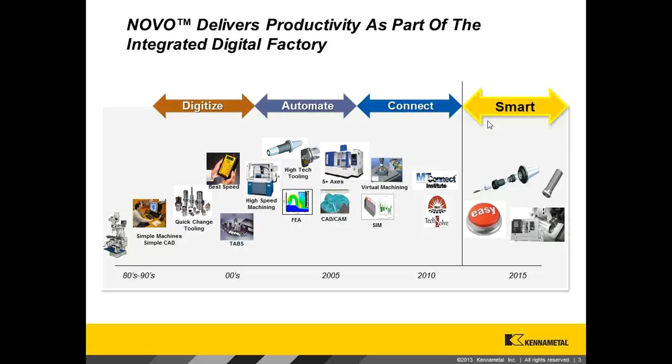And to do this, it does require a bit of data around cutting tools and knowledge around cutting tools to make all these systems work together. So as Kennametal, we've been investing not only in the latest technology to make our cutting tools better, but the latest digital experience about how our products can interact in the digital factory of the future. And this is going to be critical for all of us moving forward to meet the challenges of the megatrends on the market. So what we've started first is in the process planning area.

So typically in the past, we all know that cutting tools, while they're only 2 to 3% the cost of goods sold for a machine component, we all know that it's an enabler. If you can choose, apply machining strategies and cutting tools correctly, it's a huge enabler towards productivity in your machining process. But the key to that is always the knowledge and experience around the cutting tools, as well as the technology in the cutting tool.

So what was happening in the past, you see on the right, is typically you're working operation by operation, spindle by spindle, machine by machine to optimize processes, which does work. Kennametal actually records millions of dollars a year in what we call tool performance reports for our customers.

But what really is needed for the factory of the future is integrating this knowledge and data up front, as well as giving the productivity up front, so that you have true optimization through the art to part process.

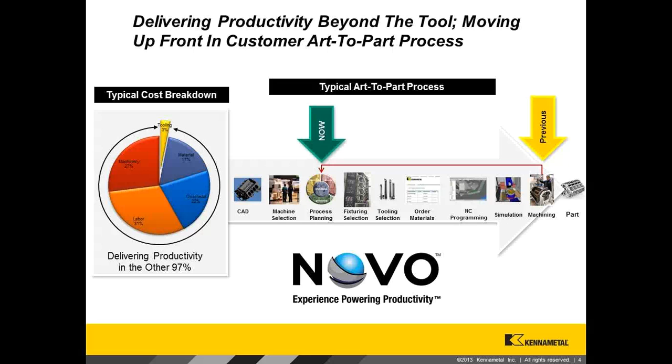So the first phase of NOVO, which is a multi-year initiative from Kennametal, is all around the process planning, the CAD/CAM area, if you will. How do we create productivity for the process plan and the process planner by bringing our application knowledge into it? And it's really around eliminating non-value added work.

So what we learned when we started talking to process planners, CAD/CAM, and engineers is they told us that they were spending an extreme amount of non-value added time searching catalogs, accessing, collaborating with multiple sources, trying to find the best, most productive solution. So what you see on the left here is a typical process planning task. You got these components, you gotta pick machining strategies, and hence cutting tool solutions for each one of these features.

And we talked to a four-person team of experts in this area. And what they told us is, in the past, this typically would take the expert cutting tool guys about 2 days together to collaborate, to put together the process planning steps, the ops, the machining strategies, and the cutting tool solutions.

And when they did that, not only was it very time-intensive, data-intensive, they wouldn't necessarily have the newest cutting tool technology because they kind of rely on tribal knowledge and what they know. They definitely wouldn't have looked up all the models and spare parts. So even if they do all this, they're still not ready to program a part.

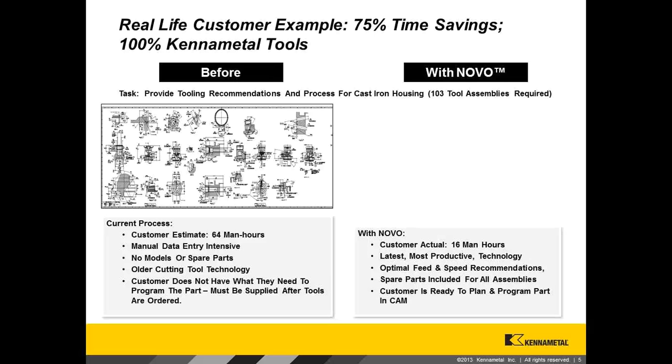With the new free NOVO PC application, which is our digital assistant on demand, they're able to produce the same process plan, which is requiring 103 tooling assemblies. It's the latest cutting tool technology because the NOVO application is cloud enabled. It's working directly with Kennametal's business system, so you have the latest technology as we launch products.

It's in there, and it's also presenting it in a very easy to use format, as well as giving all of the feed and speed recommendations and models and everything you need to program the part. So by creating this solution on the tablet or the PC, the customer is ready to plan and program his part in CAM. Much faster, much easier, much more user-friendly.

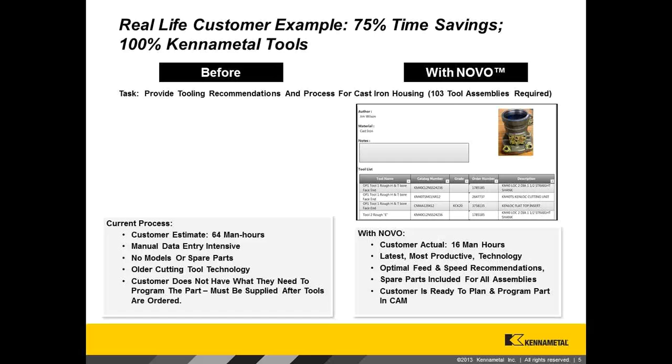So I'm going to go into a demo of the free PC and tablet application. And we launched the PC application at EMO in Hanover, Germany in September 2013. You might have seen that there's now versions available for tablets, Apple operating system, Android, and also Windows tablet versions. And that's really what's come out in the last 3 or 4 months. But that's just the beginning.

Where Kennametal really sees this going is, how do we get this knowledge seamlessly into our customers' ecosystem so that they can work in their native environment and access and leverage this knowledge without really leaving it. So what I'm going to show you now is the first, what I'd call device or system agnostic free download. You can start to get familiar with it, start to save time in your tool selection and process planning. But in the future, we're going to take this data and hopefully lead the Industry 4.0 movement and make this seamless for the digital factory of the future.

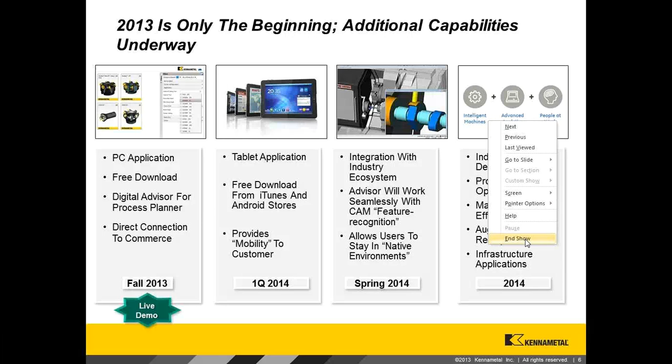So I appreciate you guys spending a little time. Hopefully you learned a little bit about what was in the background of this program from Kennametal, and you can see we have a lot of exciting things to come.

Now I'm going to launch the tablet and PC application, which is free to download from kennametal.com/NOVO.

And what you'll see when you log in is that it recognizes me, so it knows that this is Chris Merlin. It's logged in because it's cloud enabled, and I've created what you call a cloud account. Now, what the cloud account allows me to do is to organize my tools and save my tools in lists of jobs. We call them jobs, if you will, but it's really a tool list, and it's only accessible by me. And it's a real productivity enhancer because I can use it as templates. I can share the jobs with other people, and it's a nice way to organize my tooling selections for my different process plans.

However, I would tell you that you can use this solution without creating an ID. You could use it in the search methodologies without using job functionality. This would be kind of using it as a substitute for a website or a digital catalog. But the real power I'm going to show you in a minute is in this cloud-based job repository, which is something that really separates it from other solutions on the market.

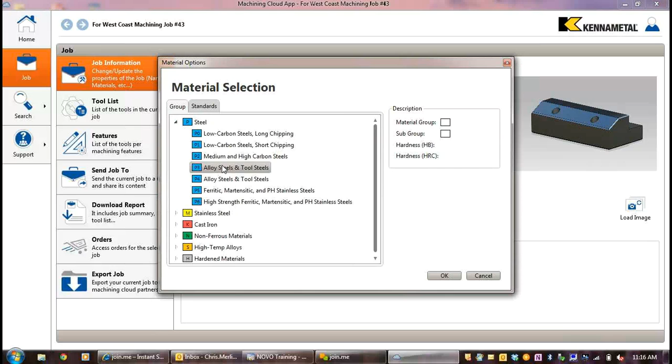The first thing you'll notice is that it allows me to select the material in the job and save it. So I can select it at the high level, just general steel, stainless steel, or I could search. I can set it at the machinability group level, which is okay, but they generally are different from manufacturer catalog to catalog. Or I can just finally go in and search for what I know is the material spec. So I'm going to use the 1040 spec here. In Kennametal's system, this is classified as a P2 machinability group.

So it's kind of already overcome that hurdle for all of you guys who are not material scientist experts like I certainly am not. So now that I've saved this in my job, typically a workpiece is only made of one material. It's already speeding my search by reducing the possible solutions to those that are best for 1040 steel, which is really what I want. So now, as I said, I'm going to work on this hole on the bottom right-hand side of the screen. I'm going to go into what we call the tool advisor. So the tool advisor is: I know what feature I want to make, help me make it.

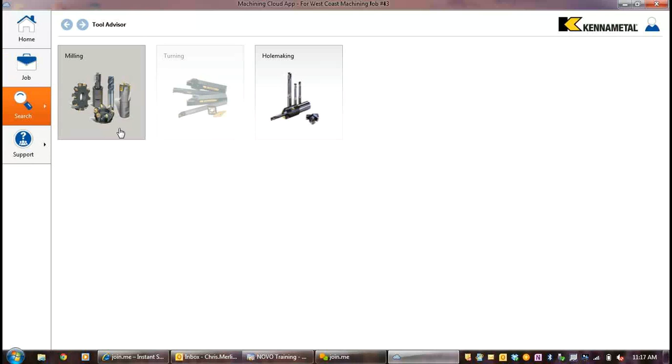So it's a hole-making operation, and now I'm into templates that look very, very familiar to me as a process planner. In this case, it's a through hole, and you'll notice, clicked on through hole, it only has 3 pieces of required information, and it's filled one of them in already for me. It knows it's a P2 group. So I can do my entry in inch or metric. In this case, I'm going to work in metric, and I'm going to make a 9mm hole, plus 0.3 minus 0. And it's about a 50mm depth of hole. So that's all it requires to give me the solution.

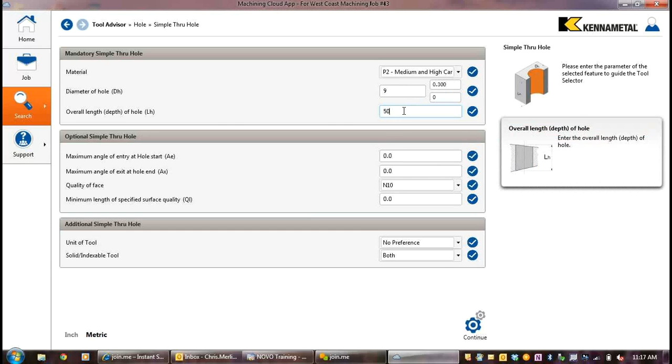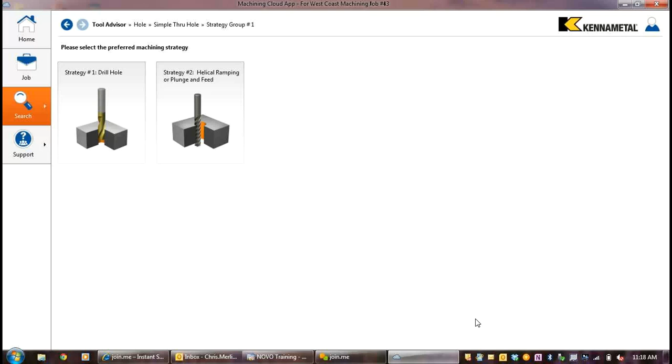However, it allows me to give it additional information about preconditions or the operating environment. So in this case, I'm going to tell it about that 8-degree angle on the face of that workpiece that I've got to contend with when I drill this hole. So again, it's thinking like a process planner. Now it's going to go into something that looks very familiar to anybody who's done this. It's called a strategy. So every process planner's got different strategies for doing different features. And the benefit of this is, again, it's following the traditional process planning thought process. And it's also allowing me to pick the strategy I'm most comfortable with, or it's allowing me to experiment with different strategies.

So in this case, I'm going to take the traditional hole drilling strategy. And once I click on that, you're going to see that it's going through 55,000 standard Kennametal tooling solutions to find the most productive and cost-effective tooling sequence to make this hole. So it's not just recommending the drill. You'll notice that it's identified that we have a couple preconditions there. First, that you've got a long L to D ratio. So that tells it 2 things. One is you have a long L to D ratio. Probably a replaceable tip drill is going to be a bit more cost-effective than a solid carbide drill.

The second thing it's going to tell you is when you have a long L to D ratio, something longer than say 5 times D, you've got to pre-center drill that hole. So now it's picked the shorter version of the KenTIP to go with my long drill, and it's recognized I have that 8-degree angle on the face of the workpiece. So remember when I talked about being a digital application engineer? No longer do you have to rely on someone finding that footnote back on page 492 of our 2,000-page catalog that says, hey, if it's greater than 5 degrees, you got to mill a flat.

This thing knows those rules already. It's picked an end mill, the most productive end mill we have in our solution, and now it's giving me a perfect 3-tool sequence to do that. It also allows me to view alternate choices. So maybe I don't normally stock a KenTIP, and I want to go through here and maybe look for a solid carbide drill, I certainly can do that.

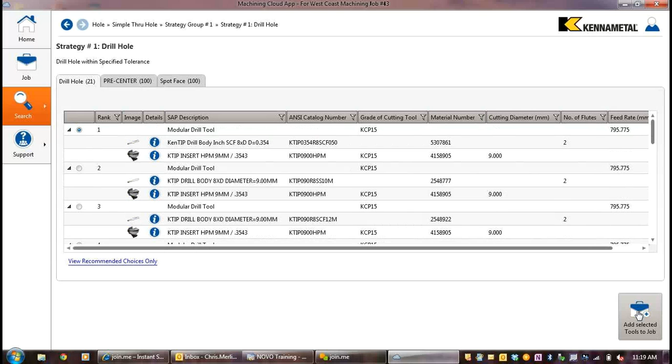So I'm going to go with what NOVO has recommended, this three-tool sequence, and this is where the job functionality starts to come into effect. So I add it to my job. Now I've got it saved for future use. Maybe I was working with a colleague of mine in the process planning department and said, hey Joe, remember that work piece we were working on? Well, I got a nice solution for that hole on the right-hand side. Let me share that job with you.

I put his email address in. If he's got a cloud account, it's just going to pop up right in his tool list as well. So he'll have a copy of it. I retain a copy on my desk so that I can continue to use it. He can change it on his end, send it back, so you have the original copy, and he can also play with it. So now I've got my three-tool sequence for this hole, and I want to go ahead and program my machine. So next thing I've got to contend with is I've got to build my tooling assemblies, and I've got to adapt it to my machine.

So I'm going to pick the end mill that's on here. I'm going to open it, and now it's going into what they call the tool configurator. So the configurator is a smart system which maps stuff that fits together and works together. So it error-proofs for you. You know the stuff is supposed to go together. It won't give you a Weldon shank into a hydraulic chuck. And it speeds your selection process because once I add the adaptive item, it's starting only with the 40 items that fit this particular tool, not the 1,000-page systems catalog.

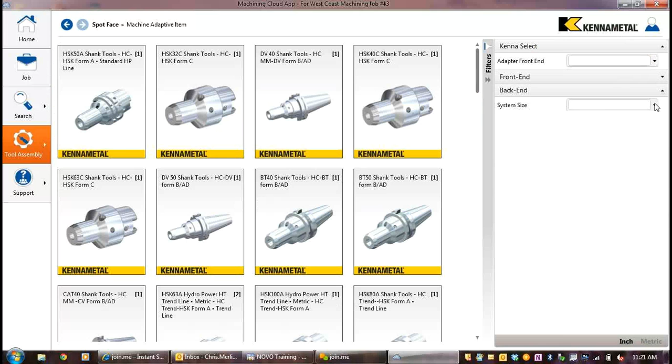So I can go in. Typically, we think about system sizes. Say I got KM in my shop here. I can check availability live if I want. So we used to only give availability information to folks with a commercial account, which is typically the purchasing people. If you're a process planner or working in CAD/CAM, you may not have access to purchasing, but you need to know the tools in stock if you got that job tomorrow. So that's another new thing from NOVO. We're answering for the guy who's programming it. Does it work for me, and is it in stock at Kennametal, which is great.

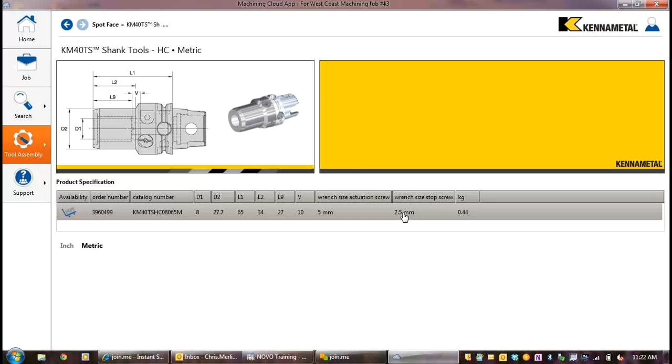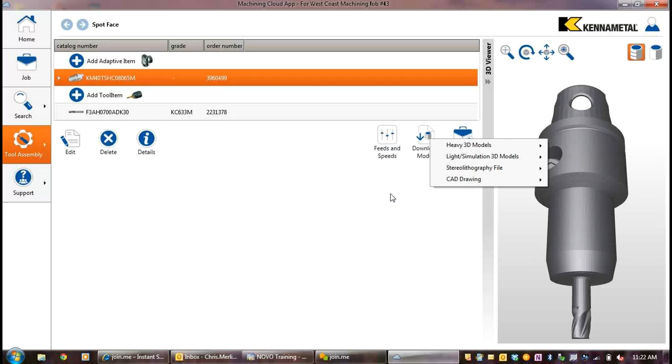So I'm going to add this to my assembly, and now it's building live for me the piece of information as a process planner I really need to program my part. It's building my 3D assembly model. It also allows me to download it into common files for import into my simulation or CAD/CAM system. In fact, if you go to the Vericut website, you'll see they've got a nice demo on there on how the models work very well with their system. But this is a full working model. Download into my system, and it's really the data I need.

And it gives me a dynamic feed and speed calculator, so I can change the feeds and speeds as I wish, and it'll save it along with this model and go with the job. So the job package has got all the information I need to program my part. So in this case, I can change the radial width of cut, maybe not so applicable in a small end mill, but a large indexable face mill. I could try radial engagement, see how it affects my horsepower requirements and so forth.

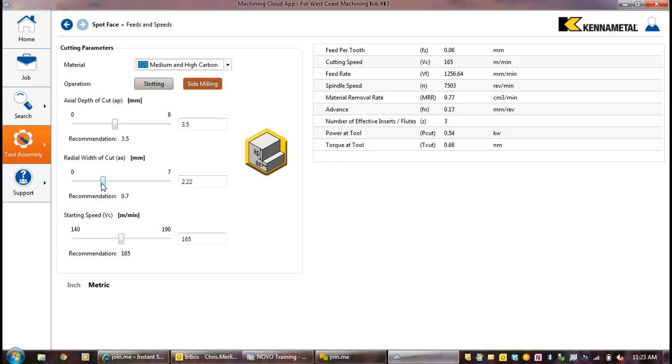So that's the first use case. I've found a feature I want to program. I've given a little information to the application. It's given me the most productive sequence to machine that. It's allowed me to save it in a job for future reference. It's given me the feeds and speeds and the models, and it's allowed me to adapt it to my machine, and I've got a great solution for that feature. The next use case you might have in this same job is, I don't want NOVO to give me, I know what I'm looking for.

So let me look in here in what we call the search by product family. So I go into the search by product family, and this is an electronic catalog, if you will. Now remember, I've selected P2, so instead of seeing 55,000 Kennametal tools, you're already only seeing the subset that's really good for P2. So I'm looking for a drill. We'll go with the drill example again.

And what's nice about NOVO is I can actually stack capabilities, or features, on top of each other to further refine the set. So a use case might be, I got to make this workpiece in P2, in 1040 steel. I got to buy a new drill for it. But I get a lot of jobs in titanium or Inconel, so I want to make sure that it'll work in high temp alloys as well.

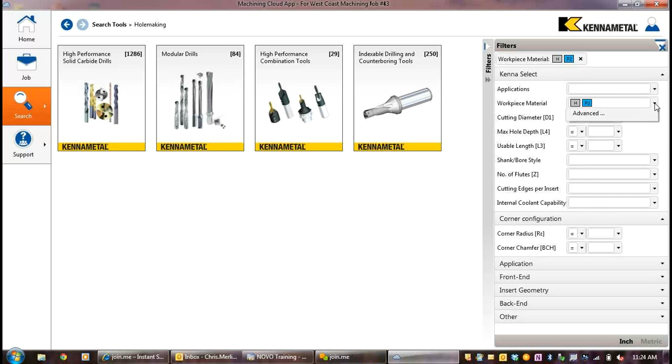So now that I've added that on, you'll see the subset of solutions has come down. Sorry about that, I got to get into the high temp alloys. So the subset of solutions has come down. I've got only solutions that work in P2 steel and high temperature alloys.

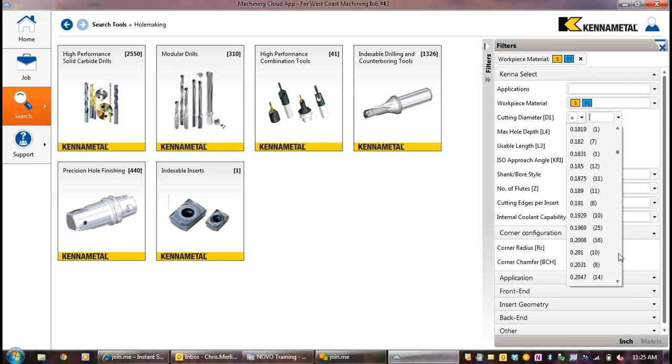Now I'm going to go in typical use cases. It's diameter, right? You're looking for a drill, so give me a quarter inch drill. You can also type it in there. I just click on there. I'm more comfortable with the drop-down menus, and max hole depth of over 1.5 inches. Now I've got, in a couple clicks, from 55,000 items down to the 4 drills that'll work for my application.

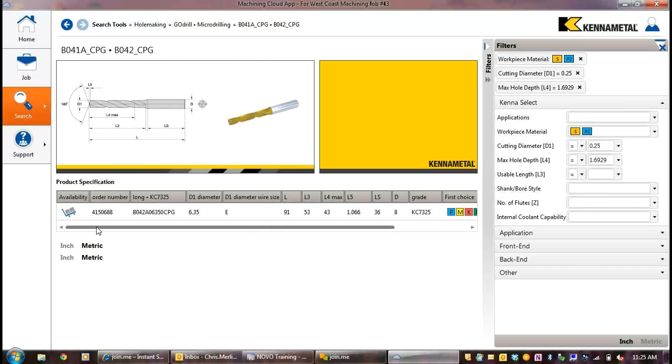Now the use case might be, well, if any of these will work, let me find the one that's in stock locally. I can click on this one very easy. That one's not in stock, so I could go back and pick another one here, see if it's in stock. We'll find one that's in stock, add it to my job. Perfect. This one's in stock. I'm going to add it to my job.

So in a matter of a few seconds. In the former environment, if I'm a process planner, I might have gone through all that process. What we find is you're saving about 50 to 75% of your time versus using catalogs. So I would have gone through all that time in the catalog. Then you send it to your purchasing agent and you find the items not in stock, or you send it to your distributor, you find items not in stock.

That is really frustrating. So if you've got a job tomorrow, you can find the drills that fit your requirement, confirm it's in stock, send it off, and the final step is once you send it to your purchasing agent, what they can now do is easily add the tools to their shopping cart, so they can add this drill that you added here, or add the whole assembly, or they can add just a piece of the assembly.

Now they can easily go in, enter their Kennametal Connect account, or if you've sent it to the distributor, they can add their Connect account, and they can order it. It's very seamless to work with the commerce part of it.

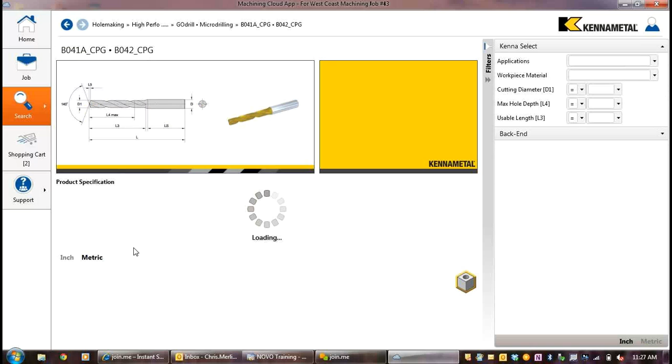I'm going to search by GoDrill, just so I know what that is. In fact, I got to put that in. So it takes me to the catalog page. I can pick the item I want, add it to my job, and now I can easily get in and find the feeds and speeds information for this particular tool in whatever material I need.

So in that wildcard search, you can basically enter any attribute with asterisks, so you could enter a material master or whatever, or you could enter a K star something, you'll get all the KSEM items. But that's a very, very handy feature for looking up particular products or families to use.

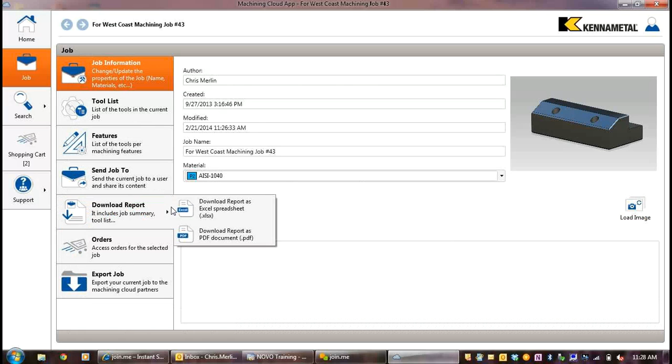So the last thing I'd like to share with you is, now that you've got your job, maybe I should show this first, what's the output of it. But now that you've got this job that you've tooled up, you can download the report into Excel. And this is really handy for a couple reasons. One is, when you're transferring data into your CAD/CAM system or your ERP system or your purchasing system, a spreadsheet makes this very easy. In fact, we have a video out there on how to use this connected with our Connect system as well.

The other thing about it is the report kind of gives you an analog way. You can print it out, you can share it. It gives you an easy way to share the information around this particular job, even if someone doesn't have a digital application or doesn't have NOVO. Everybody can use an Excel file or a PDF. So if you give it just a second here, it runs a little slower when I have the live meeting data running here. You're going to see what is a very nice report with an overview sheet on the front.

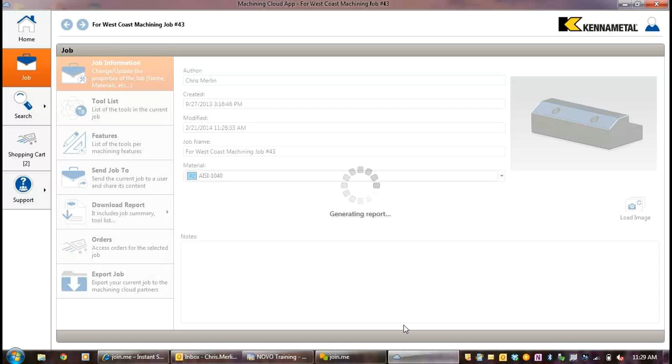So you've got the overview sheet on the front with the picture of the part I've put in here, and that's just a JPEG picture from my computer. It's not an actual file. You've got an overview of who made it, what the material is. You can put some notes in here if you want. You have all the tools that you selected for this particular job. And then each tool assembly has its own page with all the spare parts.

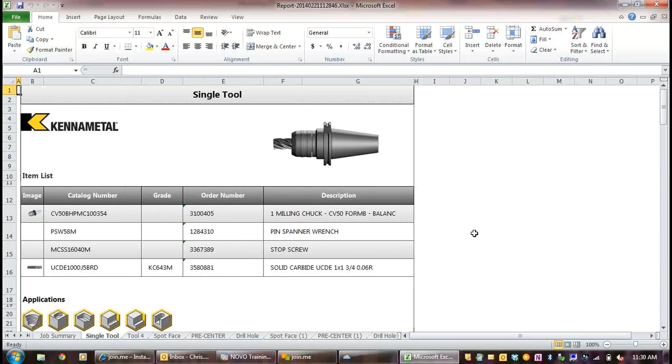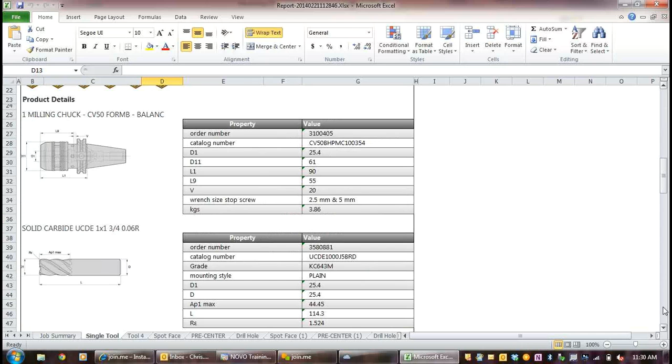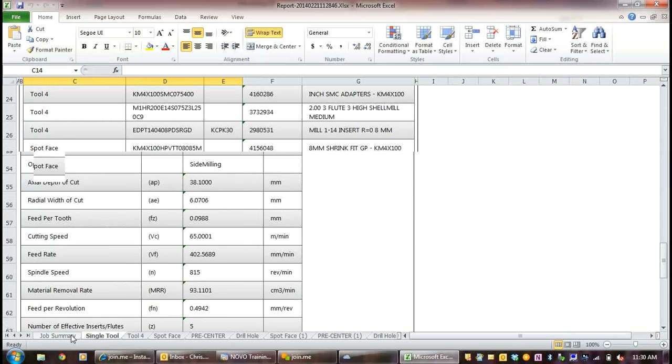We find this is a tremendous pain point for our customers. So you got a picture of the assembly, all the spare parts, 2D dimensional data for the individual components, and all the related application data at the bottom. So this is a very, very portable way to share information about a tool list or a set of tools. Very easy to share information around this job.

So hopefully what I set out to do today I've accomplished. I gave you a little background on where the market's going, why NOVO is bigger than just the application you see here, why Kennametal has chosen to go this way in a digital transformation. And I hope that you've seen the tip of the iceberg of the major functionality of the NOVO PC and tablet application, which is the tool advisor, the tool selector, the quick search, the job functionality, the models and data, the reporting functionality, and the easy link to our e-commerce system.

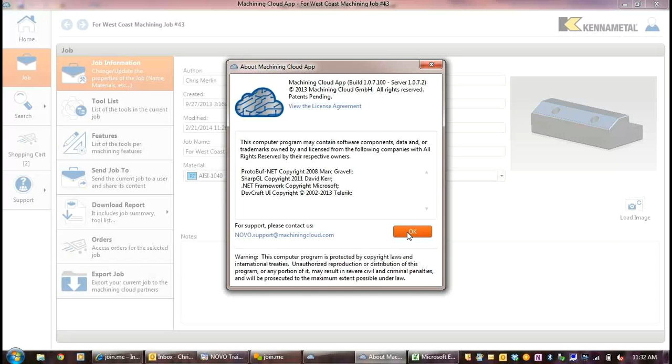I have a question, Chris. Yes. This is Tony from Sweden. I have a question. When do we get the torque for all the screws on the tools in the system? Yeah, Tony, that's a little bit longer project because we don't have the data actually in the background stored. So I think it's about a year out.

Okay. We do have it for some products, it's in the catalog, but not all. In fact, for some of them it does pop up in the job report because they've saved it near the screw, but it's not many. So this is one of these things you don't realize which data you need until you start using it. So we have to connect that up.